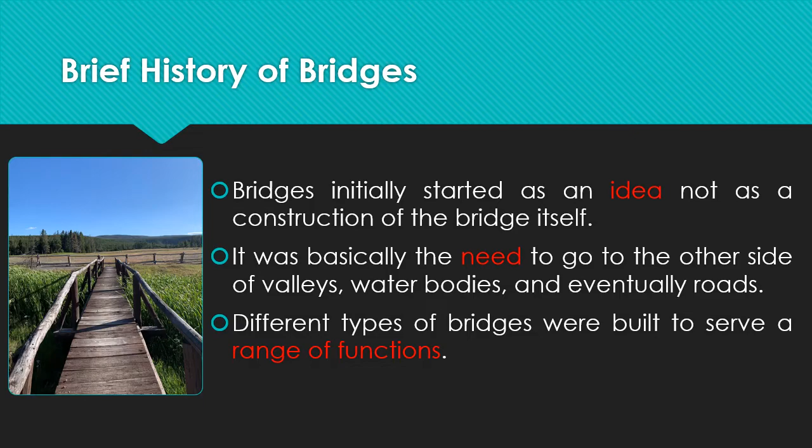Surprisingly, the earliest bridges were naturally made. Humans discovered them and they were as simple as logs or naturally collected rock arcs, like the picture in front of us, and were used to cross water streams.

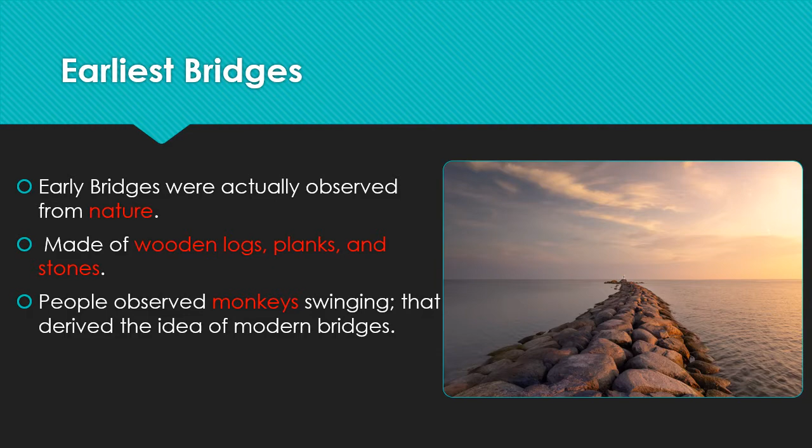An interesting backstory for the origins of the idea of suspended bridges is that humans observed how monkeys swing from vine to vine to get from place to place by twisting and braiding the vines. From this observation, the idea of connecting parallel cables with truss pieces of wood and other materials was created, and this was one of the simplest shapes of man-made bridges.

And from there, the idea continued to develop until our current time, and during this period, various types of bridges were created according to human needs.

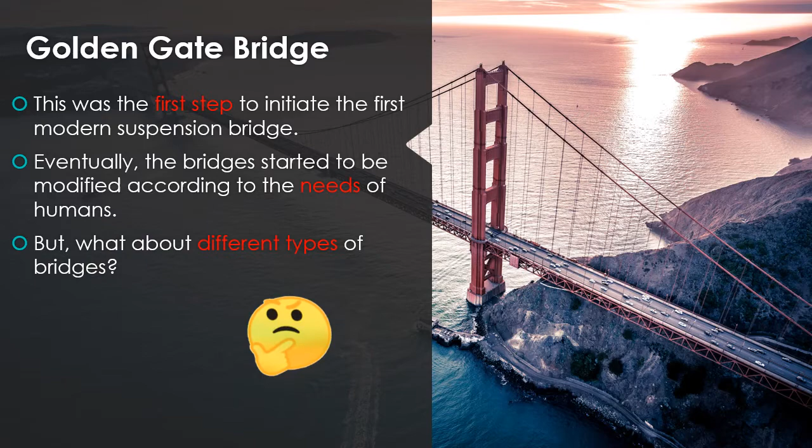What are the different types of bridges? There are some types of bridges. The truss bridge in the USA from 1900 AD, and its photo is the first one in the slide. And the bridge in China, made completely from stones, allows boats to pass due to its shallow arch, and the ancient Roman bridge, 100 BC Romans, made from mud and straw.

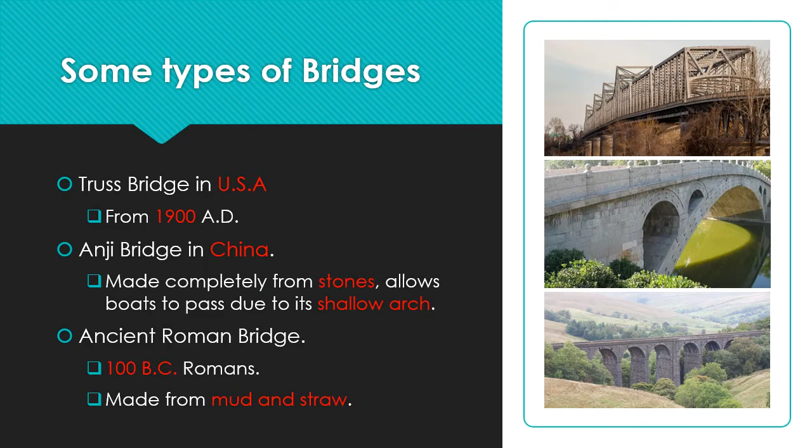First of all, the competition is hosted by the ASCE, which stands for the American Society of Civil Engineering. This society was first professionally founded in 1852, and since then it held its title with expertise and was a major support for practical activities related to civil engineering, such as bridges, of course. In addition to that, it has organized tons of competitions for high school and college students for the past 25 years.

To have a clear image of the contest, we must follow the following procedures. We first start with the design, which must be unique to satisfy the efficiency percentage of the bridge, so it must be lightweight and support heavy weights at the same time. Then we follow up with the most important part of the contest, which is constructing the bridge. The construction part is obviously hard, so it must be done with high accuracy and precision.

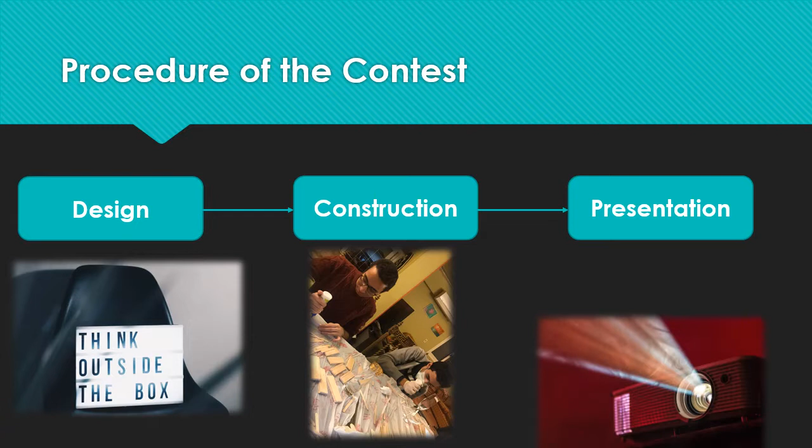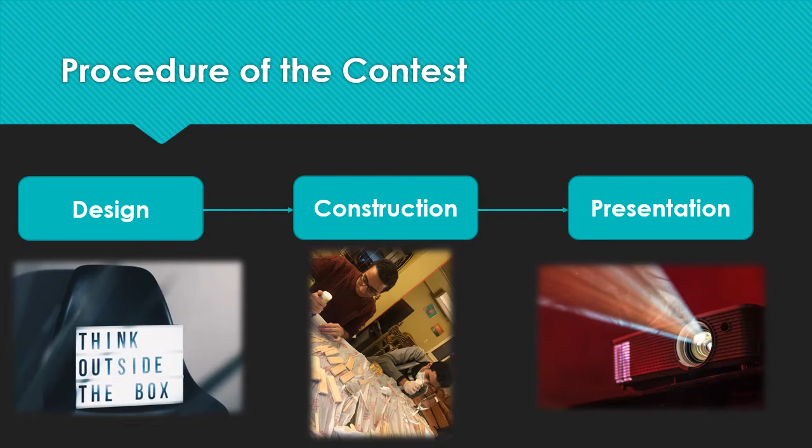Last but not least, we finish with the presentation that allows us to impress the judges and be creative. Now I'll leave you with my fellow colleague Hussein, who will talk about the background of the bridges.

Hello everyone. In this section of our presentation, we'll be talking about what drives us to build our own version of the bridge. It was basically a simulation of a bridge that would need to be built in real life for people to pass from one side of the land to the other, rather than traveling all along the shore to get to the other side, thus saving a lot of time and effort.

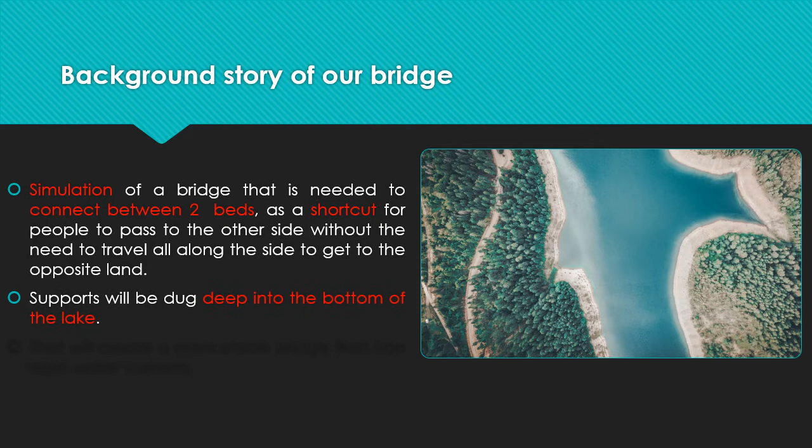Of course, such a project would need many features to get the best out of it. One of those features is supports that would be dug deep into the bottom of the lake, so as to resist water currents that may be present in the area, creating a more stable bridge.

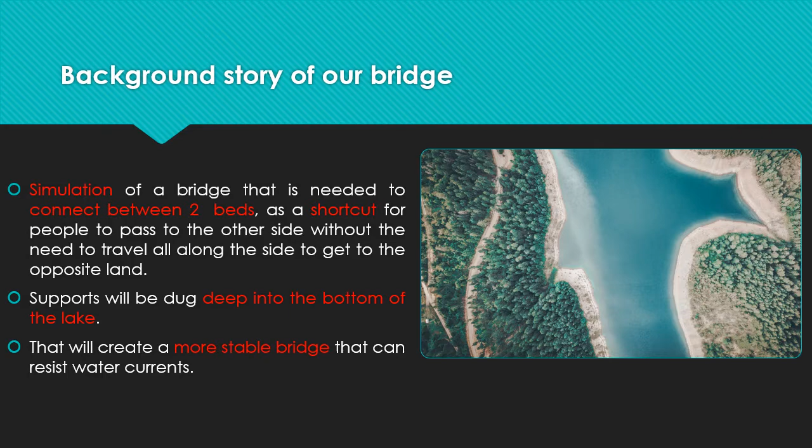Of course, one of the major requirements of the bridge is supports made of a material that is corrosion resistant, such as stainless steel, due to the presence of the chromium element, which helps a lot in achieving this function. It also must be as rigid as possible in order to resist the heavy currents we talked about in the previous slide.

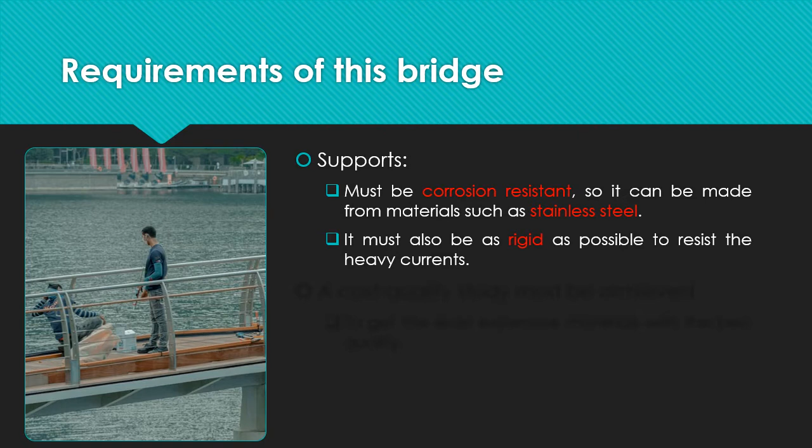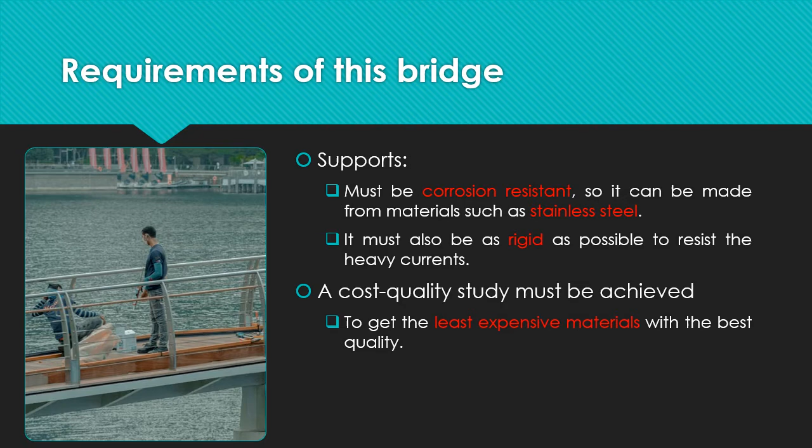Of course, a balance between cost and quality of the material must be achieved in order to get the least expensive materials with the best quality possible for our bridge.

So, why do we simulate? As I've mentioned before, our bridge here is basically a model of a real-life bridge that we need to implement somewhere. So we used our model in order to test if the design will be appropriate using the geometry of the place or not, and whether the supports would be able to withstand a high amount of loads or not.

It's also much easier to build a model than to build the whole thing and start correcting for errors, in terms of both price and human effort. So we'll save a lot of money using modeling. Of course, sticks were an easy and cheap way of modeling rather than using something like 3D printing, for example.

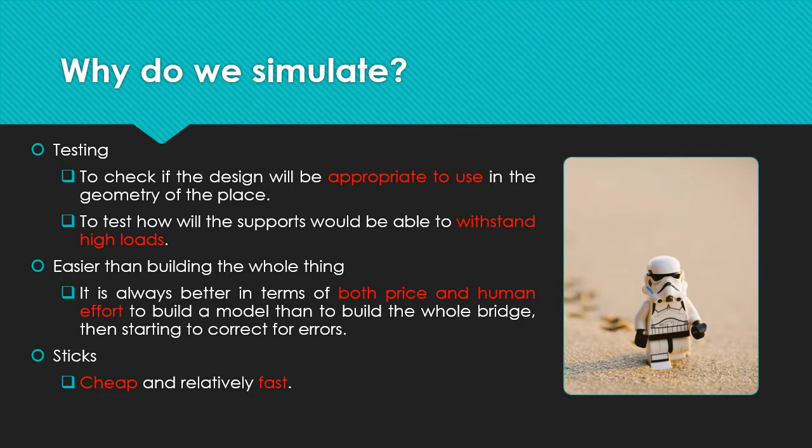So it helped us a lot in our model. Now I leave you with my colleague Nour, who will talk about how we managed to get our final model using only sticks and glue. Thank you.

Hello everyone. Now we are going to discuss how we finally approached our aim after multiple unsuccessful trials. Firstly, a few hours passed thinking deeply as a team about which design would be most suitable, following the rules, and efficient.

Puzzled between whether placing the truss above or below the bridge, after searching it was found that constructing the upper one would be much less complicated. And as advised by a fellow civil engineer's experience, this helped in designing the most efficient supports possible.

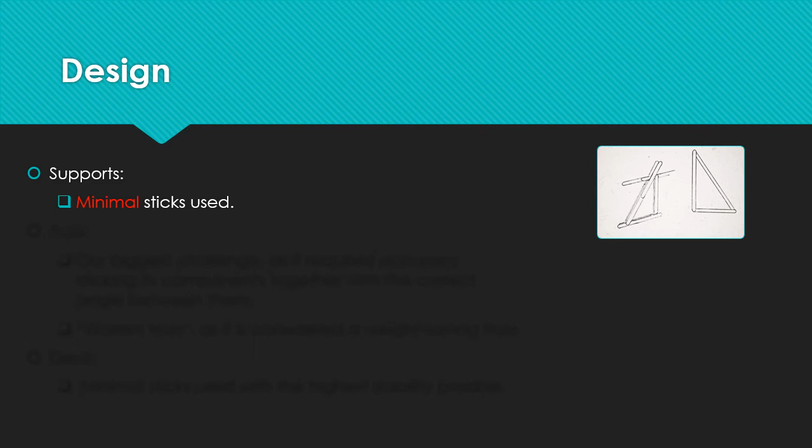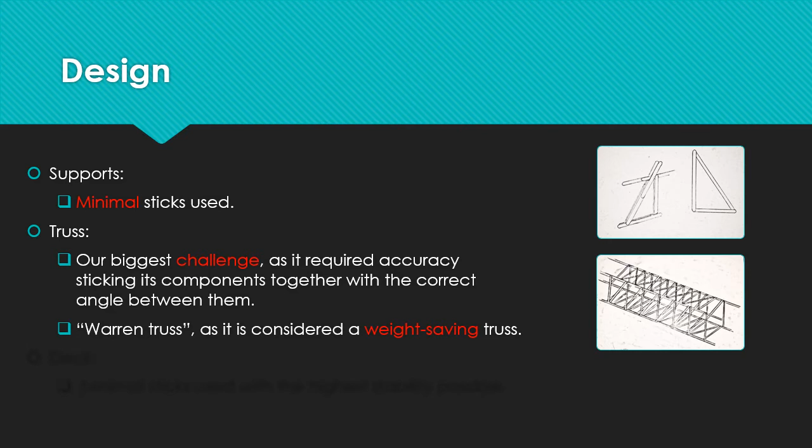Turning to the truss, the biggest challenge was gluing the sticks together accurately with the correct angles. This includes holding them together until they dry without any change in the angles. Various shapes of trusses were taken into consideration, but the chosen one was the Warren truss, as it is featured by being a weight-saving truss.

Talking about the deck, it was managed to be as stable as possible using minimal sticks.

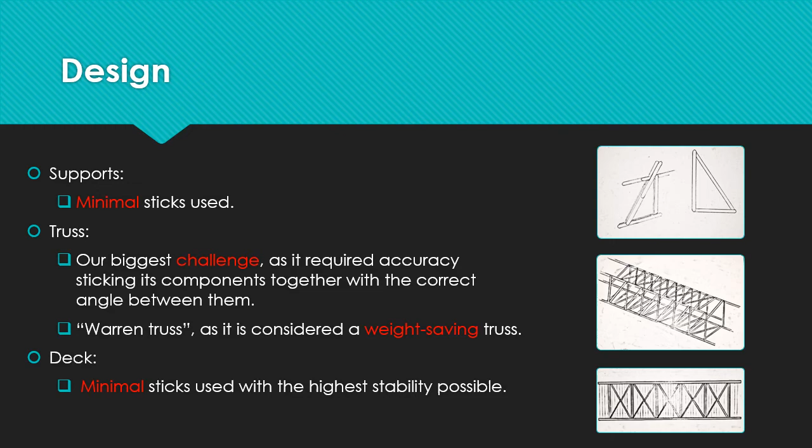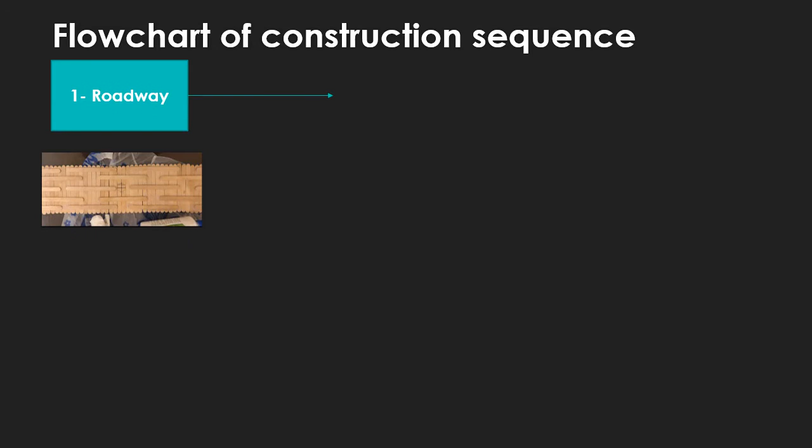Any construction has its own sequence. Ours was as follows: we built each part independently, then we connected them all together.

So the roadway was firstly built, then the truss was accurately constructed, while at the same time the other two team members were finalizing the supports. After that, the roadway was inserted into the truss and glued strongly to each other. Then the truss was held on the supports and stuck to each other accurately. And by that, the whole bridge was successfully assembled.

Now, I will leave you with my colleague Basel, talking about load transfer and the conclusion.

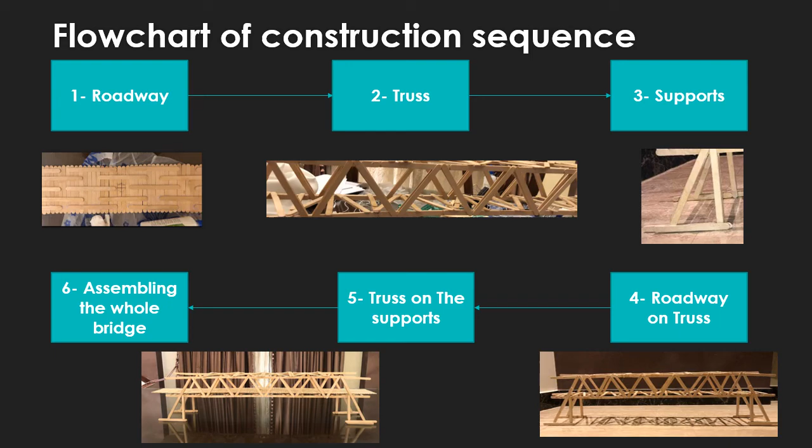And now comes my favorite part of the project, the truss. Apparently, it is an essential element of any bridge as it plays a major role in its stability.

A question that frequently got into my mind was how the load would be transferred from the roadway to the supports, or even how the roadway itself would stay stable and not break from its own weight. The answer to all of these questions lies in the truss.

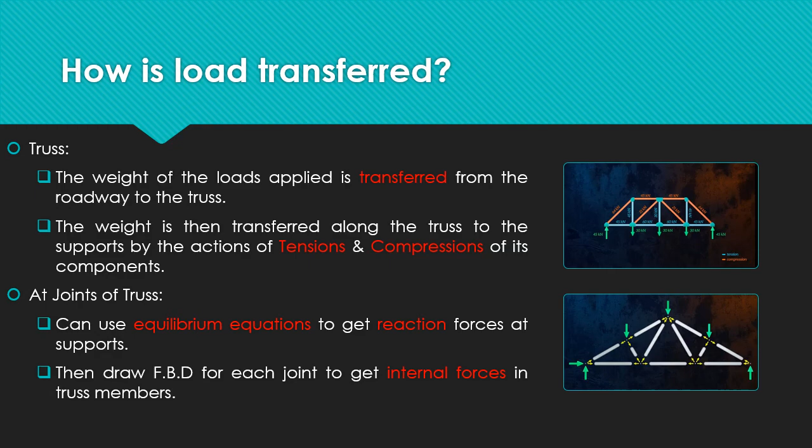Basically, the weight of both the roadway and the load applied on it are distributed all over the truss by actions of compression and tension of its components. This mechanism consequently makes the bridge a lot more stable, as the weight is not concentrated at a single point.

Working on this project certainly gave us a myriad of experience and other benefits. To begin with, our engineering experience has dramatically improved, whether it regards the theoretical part, as we understood much more about trusses and bridge mechanics, or the practical part, as we became much more aware of the importance of planning before working, and for the first time in our lives we had to build something pretty complicated without professional help.

It would be a shame not to mention the teamwork. Again, for the first time in our lives, we fathomed the importance of distributing tasks evenly and correctly, keeping in mind time management. Finally, I hope you're satisfied with our project.